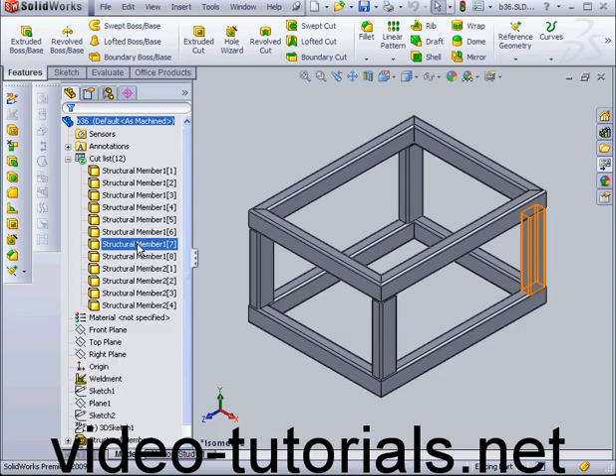For that reason, it's pretty handy to have a Weldment cut list table. Creating a Weldment cut list table is pretty similar to creating the bill of materials for an assembly. First, we need to create a cut list item. I'm going to right-click on our cut list and select Update. Now our 12 structural members have been combined into 4 cut list items.

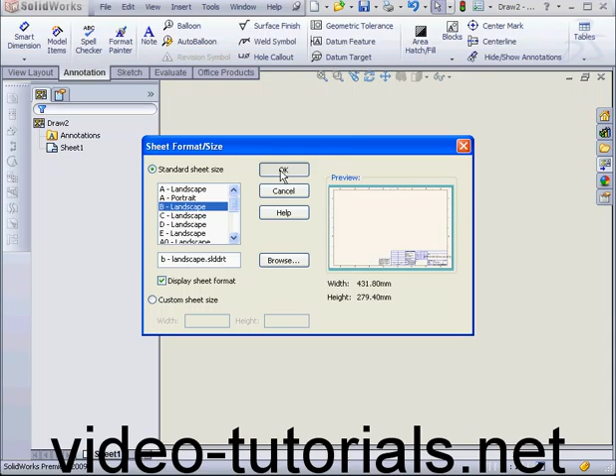Now, let's create a drawing document. Make drawing from part assembly. OK, landscape, OK. And from our view palette, let's drag in the isometric view.

Let's right-click, select Properties, and change our scale from 1 to 10 to 1 to 4.

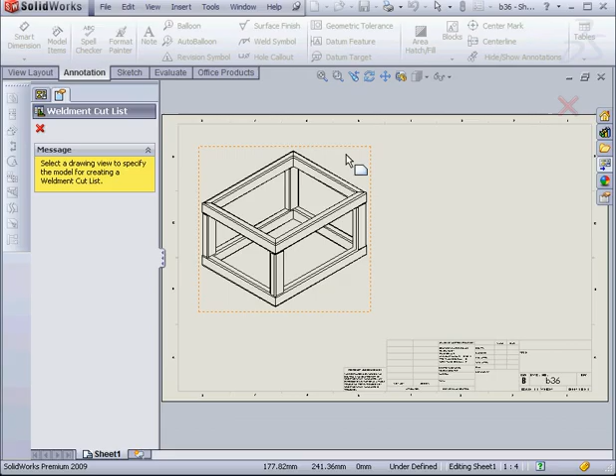Next, let's go to the Insert command on the main menu, select Tables, Weldment Cut List. At this point, I select my view, attach it to the anchor point, and click OK.

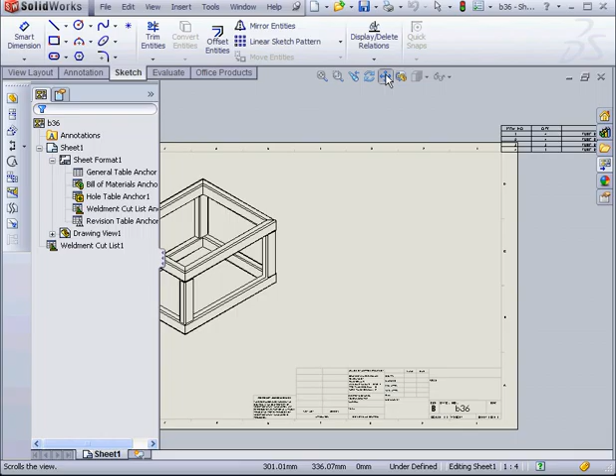Next, we need to change the anchor position. Right-click on the Weldment cut list, select Set Anchor, and we're going to set it at this corner here. Let's change the stationary corner. Click OK. We've got 4 columns in our table: item number, quantity, length, and description.

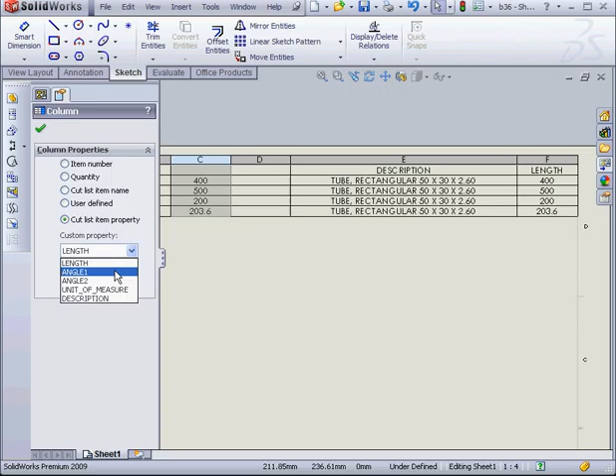Let's add a couple more columns for first and second angles. Right-click, Insert Column Right. Again, right-click, Insert Column Right. Now I'm going to select this column, select a custom property, first angle, and angle 2 here. Let's click OK.

Next, in our cut list, we've got 4 different items. Items 3 and 4 are identical. We've obviously got a problem here. One structural member is 3.6 millimeters longer.

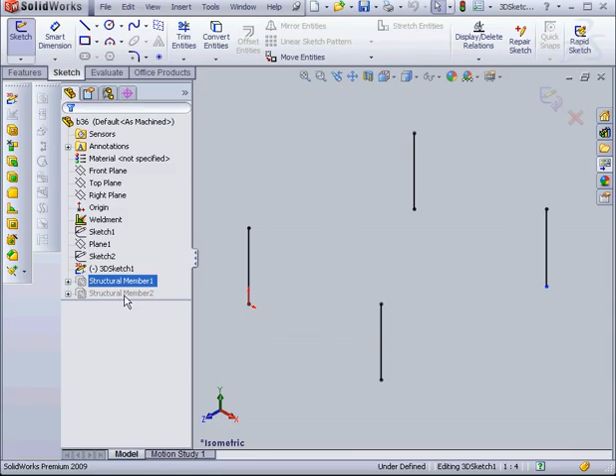Let's go to our part document to see what's going on. Here our problem is the structural member. The most likely reason is a problem with the sketch. Let's right-click and edit the sketch.

Let's make sketches 1 and 2 visible. Here's our problem. Let's grab and merge these points together and exit the sketch. Now we'll zoom to fit.

This symbol here indicates that the cut list needs to be updated. Let's right-click and choose Update. Now the cut list item 3 contains all 4 identical structural members.

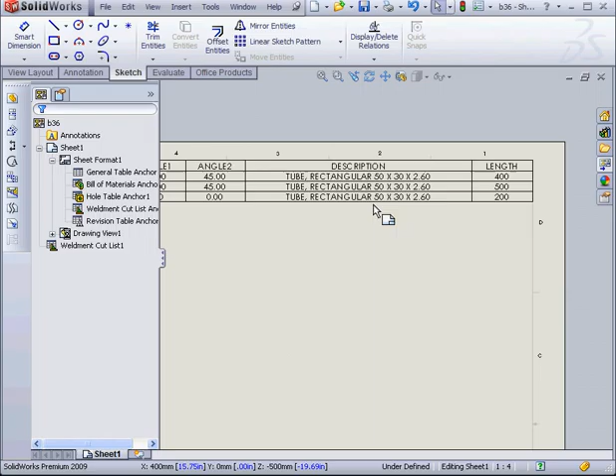Let's go back to our drawing document. We've got 3 items in our table now instead of 4.

Let's go and assign a material to our part. I'm going to assign it at the part level. Right-click, select Properties, Property Name, Material. Let's enter a value of steel, and click OK.

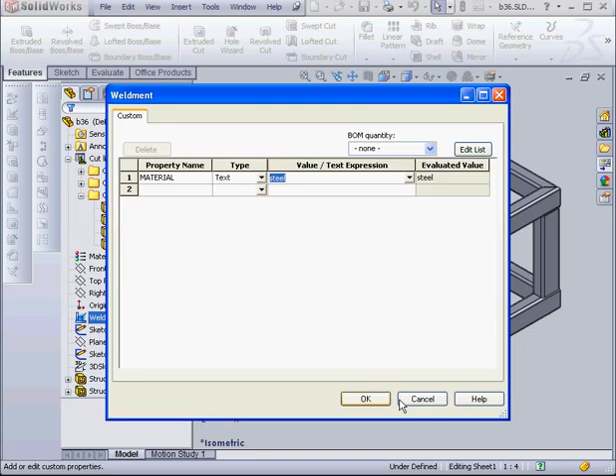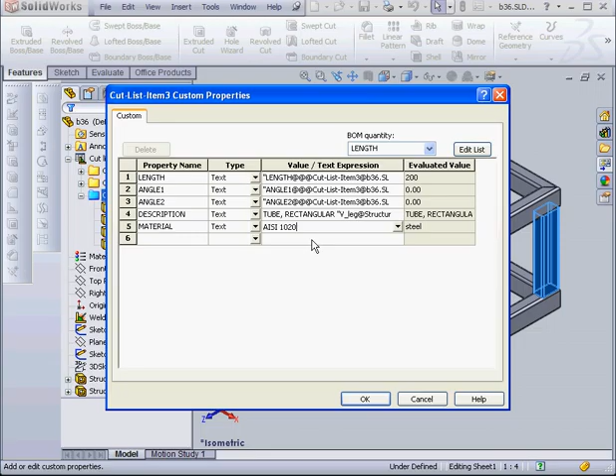Now let's assign a different material to cut list item 3. As you see, steel is already propagated here. I'm going to use AISI 1020. By the way, AISI is an acronym that stands for American Iron and Steel Institute, and the number 1020 basically indicates that it's carbon steel. Let's click OK here.

Let's go back to our drawing document. I want to insert a column to the right of the quantity column. Right-click, Insert, Column Right. Now let's select the column and choose Cut List Item Property from the column properties. We'll select Material, and here you see our AISI 1020 populates item 3.

Let's go back to our part. You can combine items in a cut list manually. Just select the cut list. Oops, let's delete that.

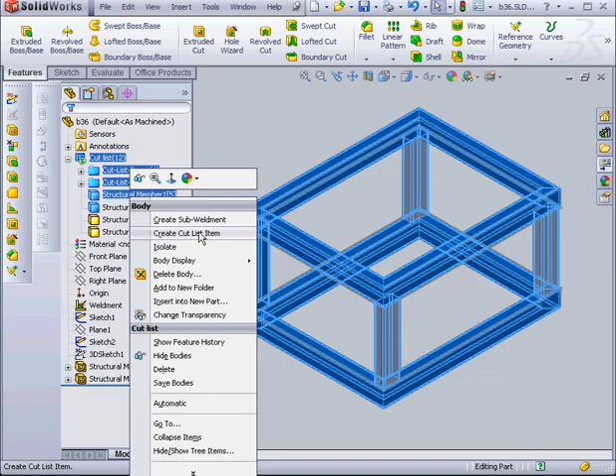Now let's shift select the structural members 5 and 6. Right-click, uncheck Automatic. Now right-click and select Create Cut List Item. Now let's shift select 6 and 7.

Oops, I can't quite get them. OK, there we go. With 6 and 7 selected, we right-click and Create Cut List Item. And lastly, number 8, right-click, Create Cut List Item.

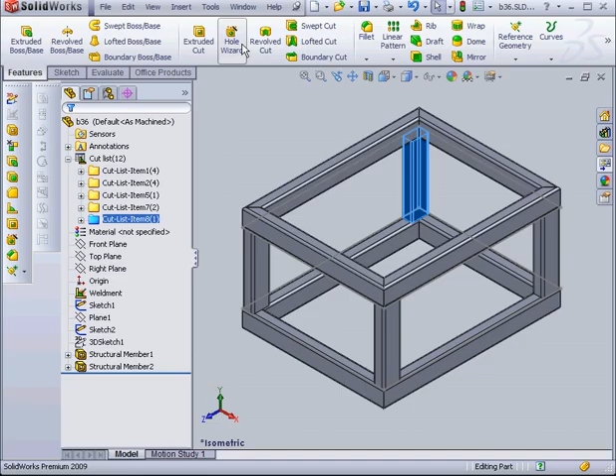The symbol on the cut list indicates that it is current and doesn't need to be updated. Let's go back to our drawing document. As you see, we have 5 items here now.

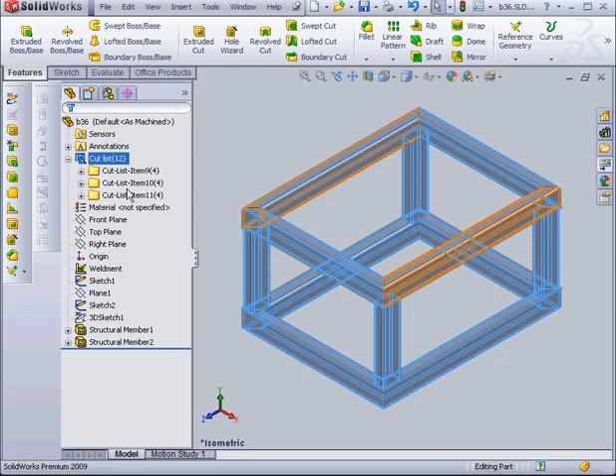Let's go back to our part. We're going to shift select, press Delete. Now right-click and choose Automatic. Once again, the structural members combine into the cut list items.

Let's go back to our drawing document to see how this is reflected in our table. Of course, the table reflects our changes as well. And this concludes our tutorial about the Weldment cut list.